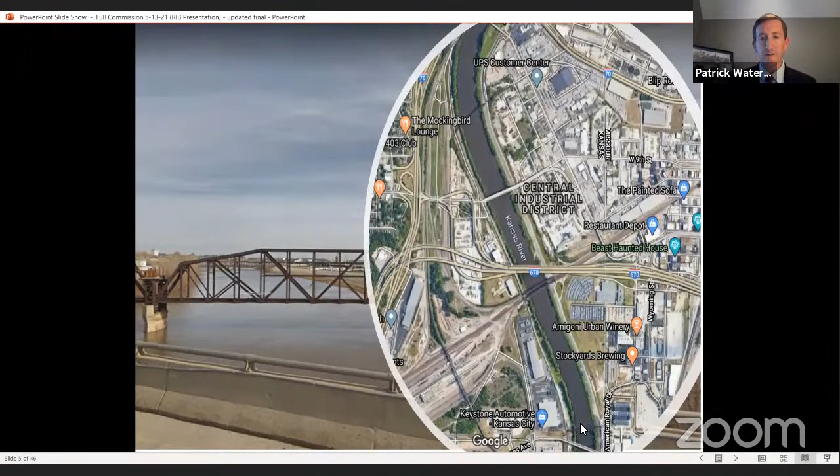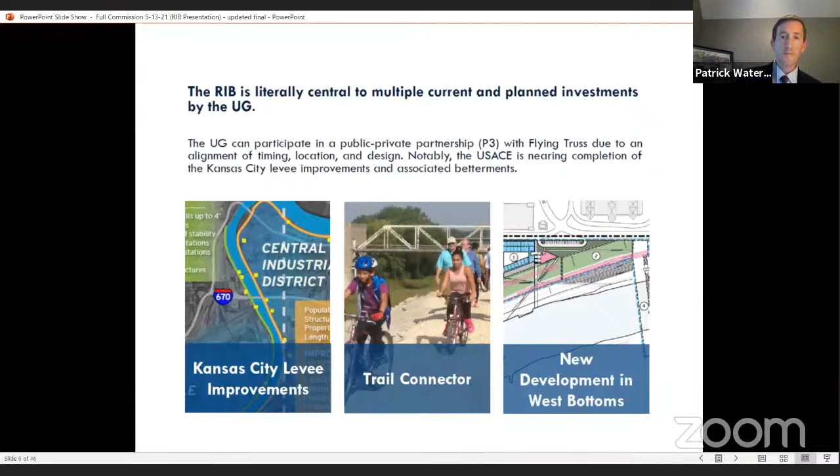So we've been really fortunate that it just seems like a confluence of events have come together here lately, a lot of different events happening all at once in this area. You just heard earlier tonight about the levee improvements and all the trails and connections that are going to be built as part of that project. We have the new development in the West Bottoms area with the Yards apartments that will be coming soon. And of course, the Armourdale master plan, which is currently in the process. So right now I'd like to turn it over to Michael Zeller of Flying Truss LLC, and he can talk about the vision he has for this project.

Thank you, Patrick. Happy to talk about this proposed public-private partnership. That is, of course, a view of the lovely Kansas River that comes sweeping in from Lawrence and bends around and heads north there to Strawberry Hill and the confluence with the Missouri River. It's a lovely view. It's a bigger river than a lot of people think. You get down on it, it's about 130 yards across. It's a big river. Next, please.

This, of course, is the Rock Island Railroad Bridge, built in 1904 by the American Bridge Company. It was an integral component to the Stockyards District that existed on both sides of the river at that time. Both sides of this bridge are fully in the city of Kansas City, Kansas. And my partners, Mike Ladden and John McGurk in Flying Truss, have leased that bridge with the intention of creating an event space and other activities.

And we were approached by the Unified Government to consider also making it a public trail that connects levee top trails on both sides, because it was explained to us that Wyandotte County has perhaps 1/27th of the linear feet of trail per person as neighboring Johnson County does. And this would be a rather expedient way to mitigate that by lighting up those levee tops, which are essentially already a trail with a view. And that's what started us on this path together, working with County Administrator Bach and his team, Catherine Carter. Next slide, please.

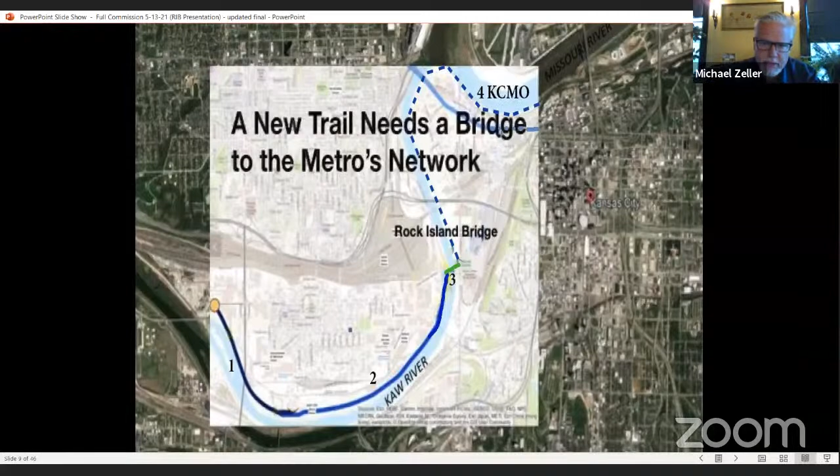So the thinking shifted, and that's what started our partnership to cross the river there and create a scenic crossing and a destination on the way to give people a reason to be on the trail in the first place. But then to eventually run the levee top up. It's a straight shot levee top run all the way up to the Riverfront Heritage Trail that connects downtown Kansas City, Kansas to Kansas City, Missouri. Next slide, please.

There's just another view of the Kaw. That's the upstream tip of the island that's in the Kansas River, as seen from the levee top. Next.

Another shot from the trail. It's nice. You're up high. You can look out over the river. This is a schematic of the Rock Island Bridge. This bridge is longer than the St.

Louis Arch is tall. This is looking south, and you see there's two main trusses, the original trusses built in 1904, installed in 1905. Each one of those is the length of an NFL football field. This is a very large structure. To the left at the bridge's eastern end is a smaller truss that was added during World War I when the levee channel was widened.

You see the Gould Evans design. The primary feature is an unobstructed pathway across the bridge 12 months a year, morning all day long through the day until nighttime for people wanting to use that public crossing. You'll also notice that we've created more real estate on the bridge.

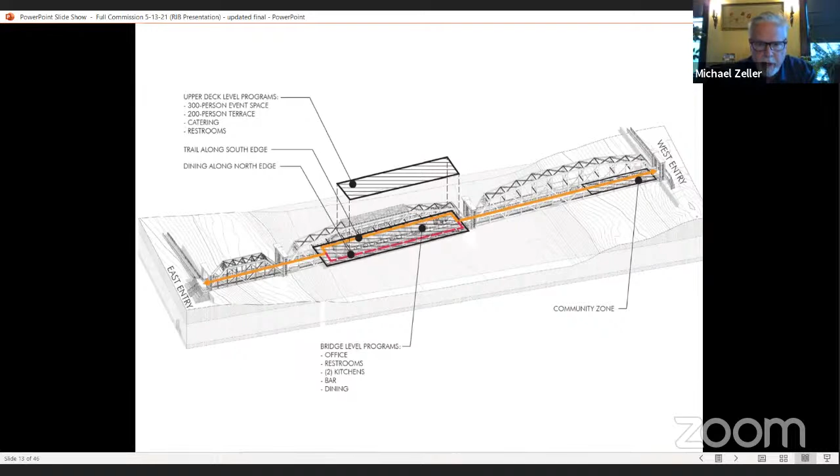And perhaps there'll be some improvements that'll take them right down to the river frontage there and realize Kansas City Metro's long-held dream to have more interaction with our big river system. Next slide, please.

That's just the welcome. That's going to look like that on both ends. The trail just comes right up, and then this will be a dismount zone as there will be so many people on the bridge. We're going to program the bridge also with simple things like buskers playing music and magicians, to art fairs and craft beer festivals. Maybe we have an agreement with Quixotic, the aerialists, to be up in the rafters. A lot of fun can be happening on that bridge with a lot of people, and we don't want people blasting through on a 10-speed. And you see the trail there comes in from the right, and then they would just dismount and then cross the bridge from there. Next.

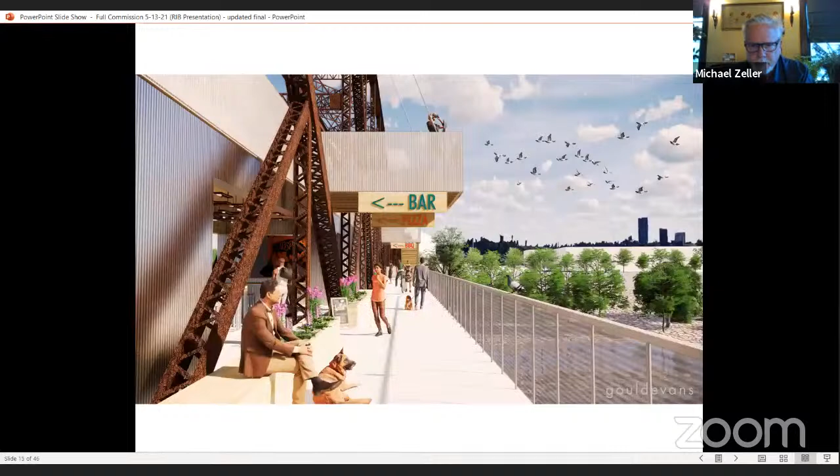That's the southern side of the bridge where we're preserving space for the public crossing. People in a chair or walking across will always be able to make their way across this bridge unimpeded. Next. That's on the north side. That's more programmed. You see there's tables and more obstruction.

When you work with architects, they ask you to think about things conceptually before they start their work. And one of the concepts that we came up with was a braided stream, so that the experience for anyone in transit is not a straightaway linear shot like a sidewalk, but it's an area that you explore and you make your way across. And now with the second level deck that we've added to the concept, you can also go up and down. Next.

That's looking southeast. So Hy-Vee Arena there is just at the top left of the screen. That's the central truss. It's 100 yards long. And you see at the top there on your left is an event space. Gould Evans Architects are doing the design work, and we have preliminary designs and are going to be going into final design stage this summer. And that shows the event space on your left there with a roof in the open position. It will be possible for us to design it to open and close. We're debating the pros and cons of that, though.

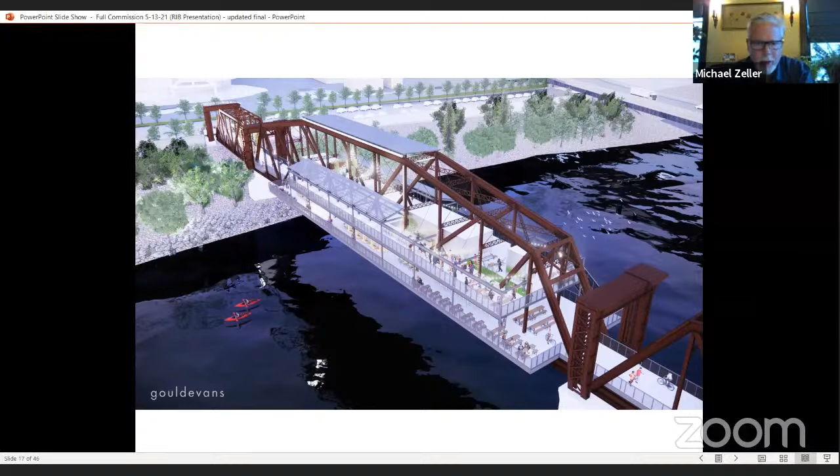The kitchens, they're not really restaurants, they're commercial kitchens, kind of like a food truck without wheels, are on the lower level. And we have letters of intent with Slaps Barbecue and Papa Keno's Pizza. And we selected them because this is going to be a spiky business out here. And on really warm evenings in the summer, when the Royals are in town and Hy-Vee Arena's going next door, and we've got programming going on that bridge, there's going to be a lot of people out there. And we really needed restaurants with a long history and a large staff, and a mothership nearby where they could prep items and send extra staff down on busy nights, because what we don't want to have is several hundred people waiting for their dinner. Next.

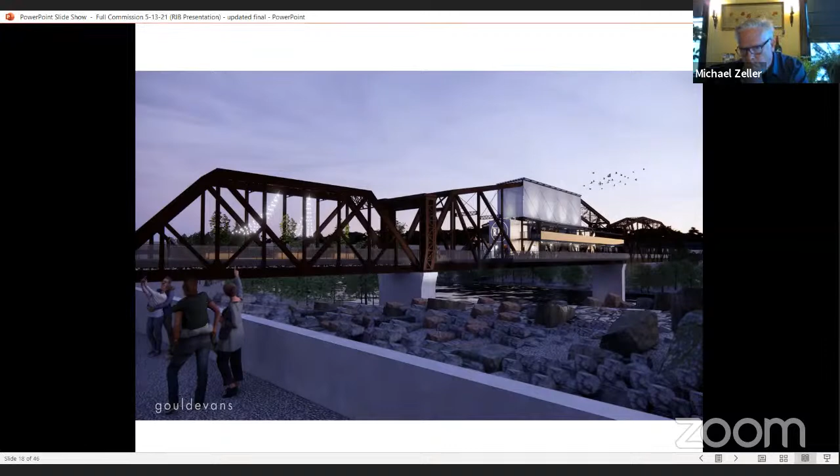That's, again, the Central Truss as viewed from the eastern bank near Hy-Vee Arena at twilight. You see the trail that people are standing on. We'll connect with that bridge. Next. That's up top in the event space. You see it now captures the full 55-foot height of the structure itself. It's about 20 feet across. It's interesting. There's a lot of little rivets and bolts, and there are lift gates to look at. It's rather cathedral-like. Next.

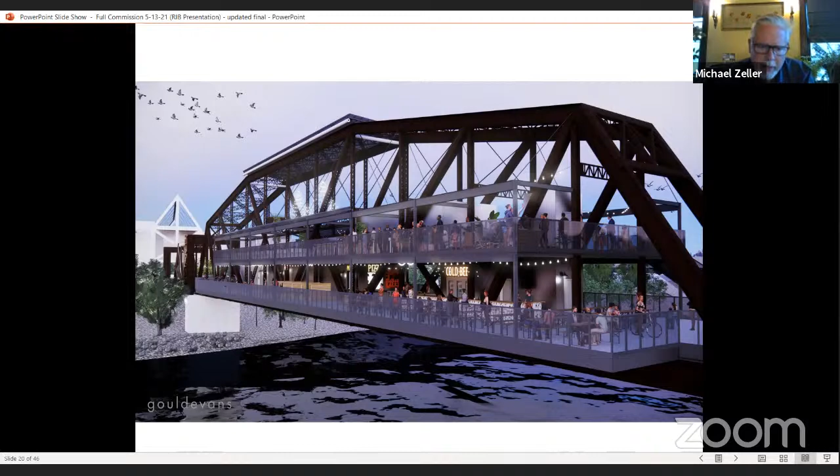And there it is again from a lower view. We've looked all over the place, and the Mid-America Regional Council study also paid Eldorado architects to examine the viability of this concept of joining up a public crossing with the destination. And they couldn't find another example of a steel bridge destination like this. There's, of course, the famous medieval bridges in China and the Ponte Vecchio Bridge in Florence. But nobody could find anything approaching this. There's little bump outs on a lot of bridges where you stop your 10-speed and take a squirt of water and look around, but nobody's taken it to this level. This will be America's and perhaps the world's first destination bridge. Next.

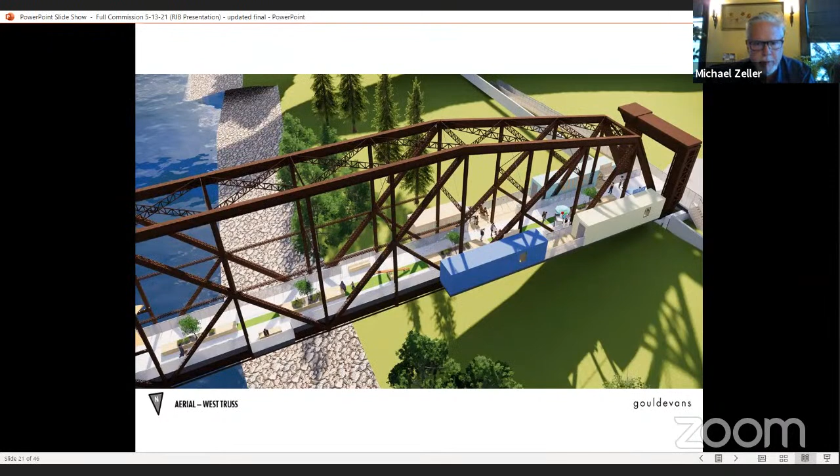That is the community zone, which we're going to turn to the community to help us name. I think it could be a great place for the KCK Farmers Market on a Saturday morning. There's a lot of activity that can happen out there. We're looking at also putting a guest kitchen and programming that area and inviting small people doing really great stuff to join us out there on that bridge in the kitchen. Next.

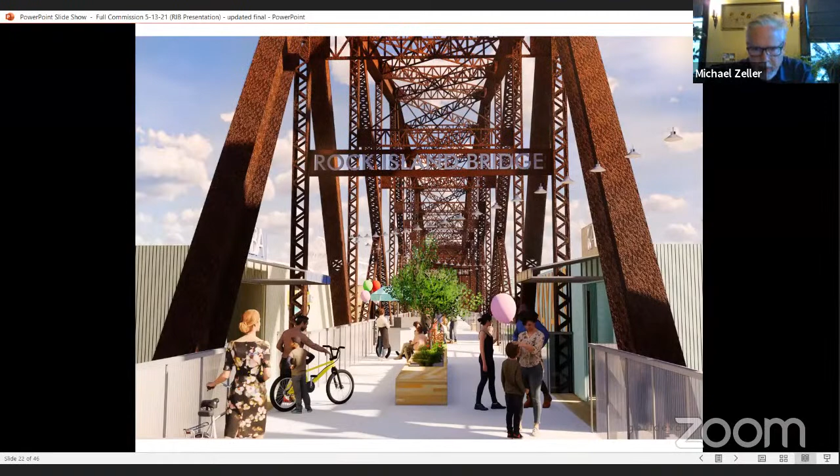And that's a view from the western end looking in at the community zone. Next.

This is a separate initiative that's probably worth mentioning, a separate LLC in which I participate as one of 14 people. Mike and Joe Pearce, who own Slaps Barbecue, the new fellow that's running the Stowers Institute, Julián Zugazagoitia that leads the Nelson Atkins, quite a mix of people have bought 2 riverboats, and frankly, they're steel barges that are 60 feet long and 20 feet wide.

And we are working on restoring them with the intent of operating them on the Kansas River as floating event spaces or docks, not as commercial service moving people around, as transit, but as entertainment. And we hope to locate one of them at the base of the Rock Island Bridge on that western shore there. We think it'll be very synergistic with what's happening on the bridge that will be lit up. And we also intend to light up the river down below. Next. This is an example.

Patrick mentioned a confluence of happy things that are coming together rather serendipitously. I think the redevelopment of the Hy-Vee Arena by Steve Foutch, Flaherty Collins' decision to move in next door, John McGurk and Mike Ladden and I moving forward with the Rock Island Bridge, and just a general realization in the metro that, hey, this is a good place to start. I think what's happening at Berkley Park is also a great development on our big river system, but this is a great spot to really put our arms around our big river system. And I use that word system intentionally because the Kaw is really part of it.

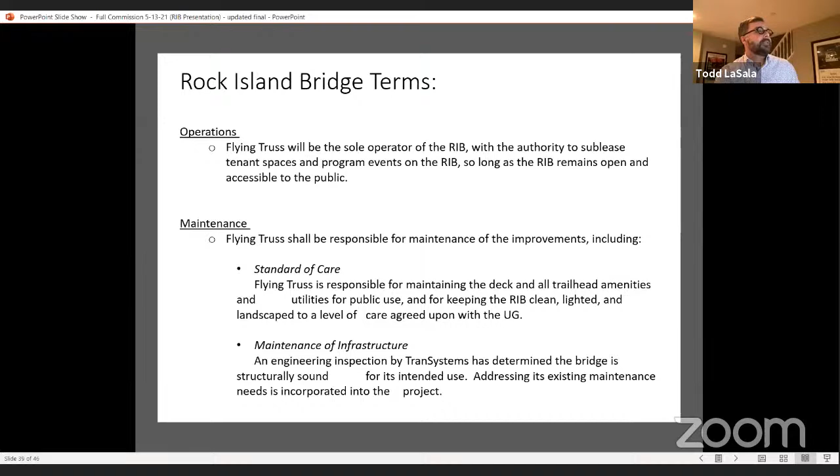And this development agreement, like others, has commitments back to us from the developer where they're agreeing to do some things and provide some community benefit and give the UG opportunities to have bridge events. And those are built into both the lease and the management agreement. Next slide, please.

Financing, folks did a good job of touching this and said that the UG's commitment is to put this $2 million in, $75,000 initially. Then when the conditions are satisfied, there's access to the rest. The developer will submit certificates of expenditure to show what they're spending the money on, and we will pay for it on that basis. But it's a $2 million commitment, and the UG is hoping to get that money back through the TIF that Patrick talked about and the CID. And HR&A has projected that we're likely to get that back somewhere in the neighborhood of 12 to 15 years.

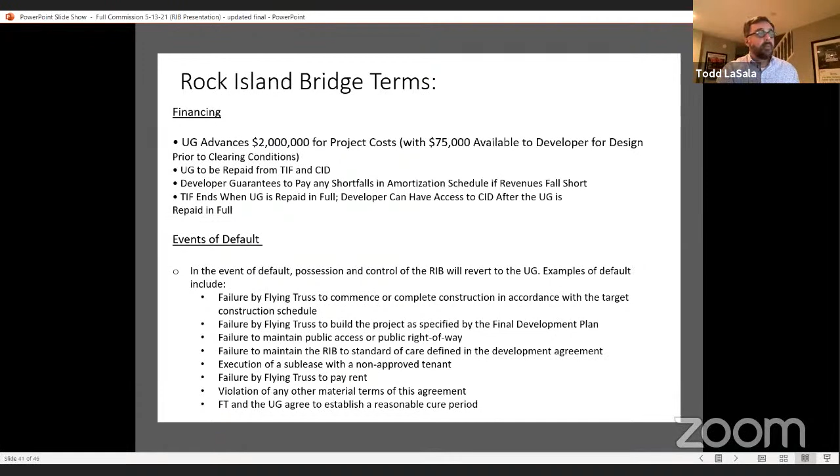For those at ED&F, there have been a handful of changes to this document that you haven't seen. So I'm going to quickly hit those and summarize those and then stop and volunteer to answer any questions people may have. But there are 4 or 5 things here. One, we have moved the date where we start collection of the CID sales tax. We moved that forward to July 1st, 2023, really to line up with the contemplated date of substantial completion for the project, and that makes sense.

The developer also asked for some changes about the insurance provisions that will allow them not to go procure and carry the insurance until they get out there and start construction activity on the bridge. Third, there was some discussion at ED&F that the committee will remember about MBE commitments with regard to those operators Mike talked about. In the event that one of those doesn't come through or closes at some point, needs to be replaced, the developer is agreeing to make some commitments about local minority and women-owned business participation.

Fourth, there are some significant changes to the management agreement that are primarily about making sure that it complies with GASB accounting rules and that it's really truly a management agreement and not a lease in disguise. So the developer agreed that the UG got to have more control of the operations out there, standards of operations for those public components on the bridge.

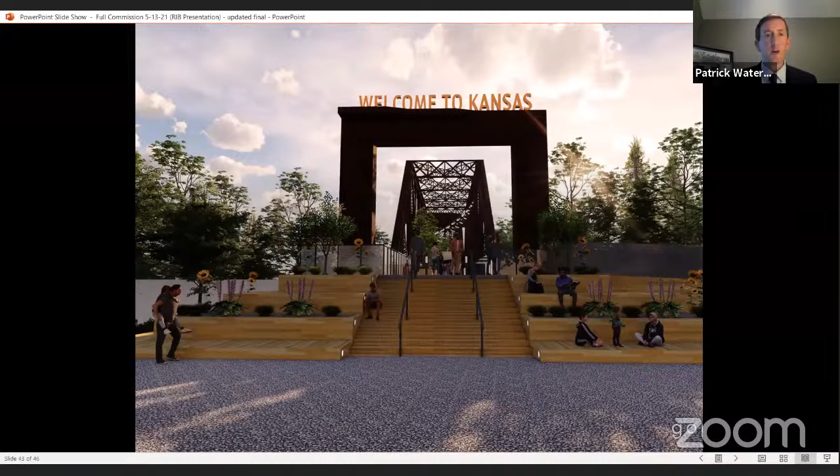Yeah, so since we have 2 items here, I'll just address the second one so that we can discuss both at the same time, and the public can discuss both at the same time. In addition to the development agreement, we have the ordinance adding property to the existing riverfront redevelopment district. You may recall that the current district was approved last August. We are requesting a small change to add additional areas on both the east and west side of the bridge for parking and trail connections.

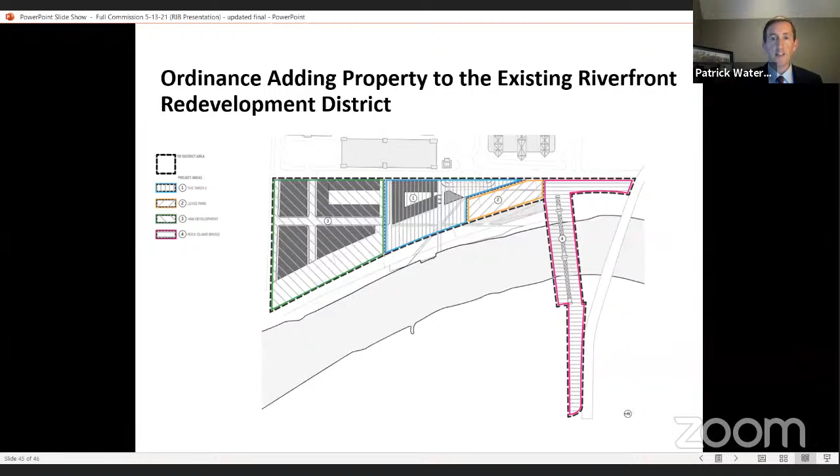And really what we're talking about is this area in kind of pink or red right here, and then this area of land right here. So just a small addition on either side of the bridge. And this just gives you a sense, we're almost to the end of the TIF process. Just a few more dates. We'll do a conformance finding by the Planning Commission, set the resolution for a public hearing on project area number 4. And then if approved tonight, the final date of approval would be on July 1st. And with that, I'll send it back.

All right, thank you. At this time, I'm going to open the public hearing. So is there anyone present who would like to speak in favor of this item? Mayor, the clerk's office received 2 requests to speak from people on the attendee side. Okay, so please state your name and city of residency for the record. You'll be given up to 3 minutes to state your comments. All right, Mr. Benjamin Walker would be up first.

Hello, my name is Benjamin Walker. I'm a 4th generation Armourdale resident. And I just want to say that I highly support the bridge project and everything that it is about and that it will do for the community. The Kaw River is a natural asset that's at our back door. And it's about time that we stop ignoring it and that we utilize it.